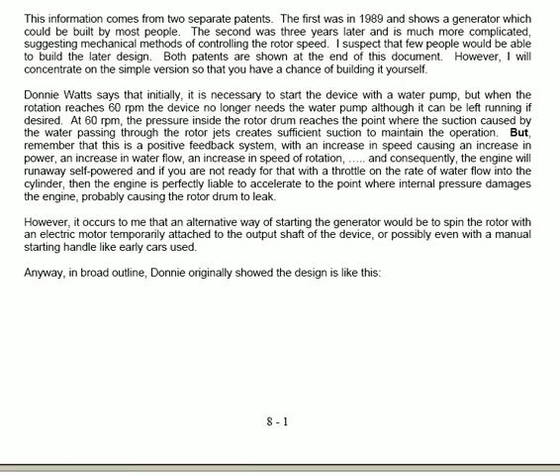However, it occurs to me that an alternative way of starting the generator would be to spin the rotor with an electric motor temporarily attached to the output shaft of the device, or possibly even with a manual starting handle like early cars used. Anyway, in broad outline, Donnie originally showed the design like this.

You have a hollow cylinder which is 48 inches in diameter, 6 inches thick, and has 16 jets angled at 25 to 30 degrees to the cylinder tangent. There's a special coupling, one side of which is stationary, the other side of which rotates, feeding a fluid into the drum via the pressure applied by a pump, and with a valve in the line so that you can shut it down or choke it off to a lower speed if that becomes necessary.

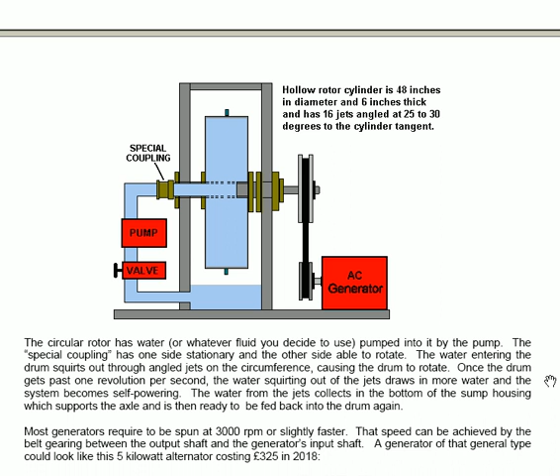The output shaft through pulleys drives an AC generator or alternator. The circular rotor has water or whatever fluid you want to use pumped into it by the pump. Most generators require to be spun at 3000 revs per minute or slightly faster. That speed can be achieved by the belt gearing between the output shaft and the generator's input shaft. That linkage there.

A generator of that general type could look like this particular one here, which is a 5 kilowatt alternator, which in 2018 cost £325 in the UK.

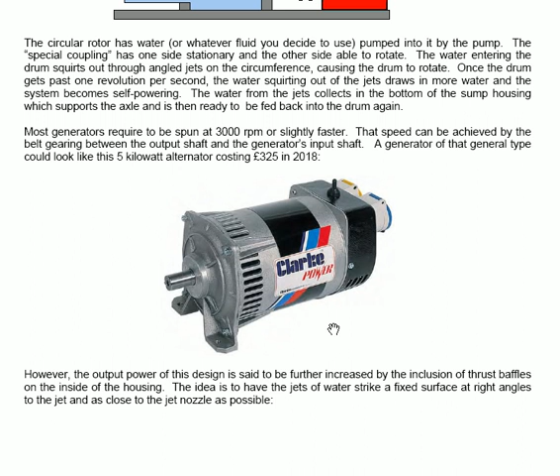However, the output power of this design is said to be further increased by the inclusion of thrust baffles on the inside of the housing. The idea is to have jets of water strike a fixed surface at right angles to the jet and as close to the jet nozzle as possible.

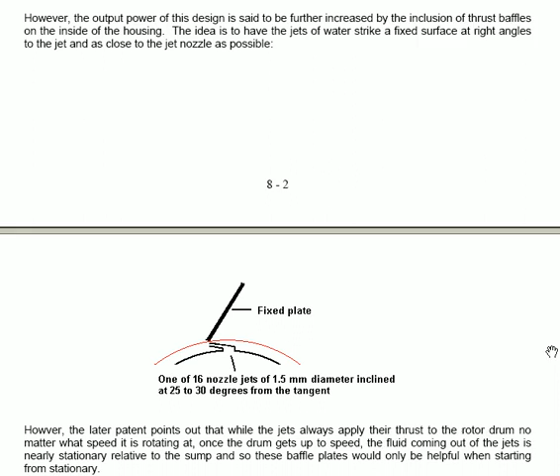However, the later patent points out that while the jets always apply their thrust to the rotor drum, no matter what speed the drum is rotating, once the drum gets up to speed, the fluid coming out of the jets is nearly stationary relative to the sump, and so these baffle plates would only be helpful when starting from stationary.

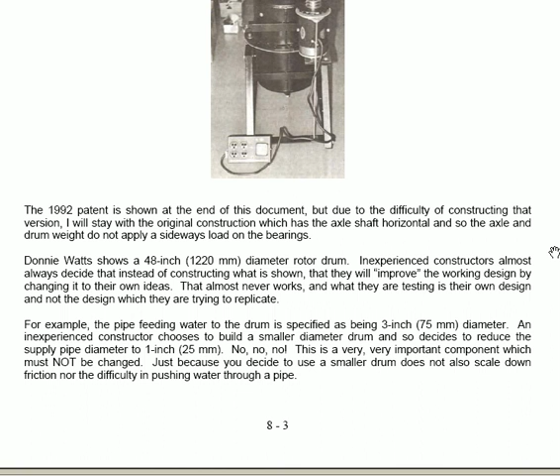The 1992 patent is shown at the end of the document, but due to the difficulty of constructing that version, I will stay with the original construction, which has the axle shaft horizontal, and so the axle and drum weight do not apply a sideways load on the bearings. Donnie shows a 48-inch drum, which is 1220 millimeters diameter rotor drum.

Inexperienced constructors almost always decide that instead of constructing what is shown, they will improve the working design by changing it to their own ideas. That almost never works, and what they are testing is their own design and not the design which they're trying to replicate. And then they end up going online and saying, "Oh, this design doesn't work. I built it and it doesn't work," ignoring the fact that they never ever built it the way it was designed. But anyway.

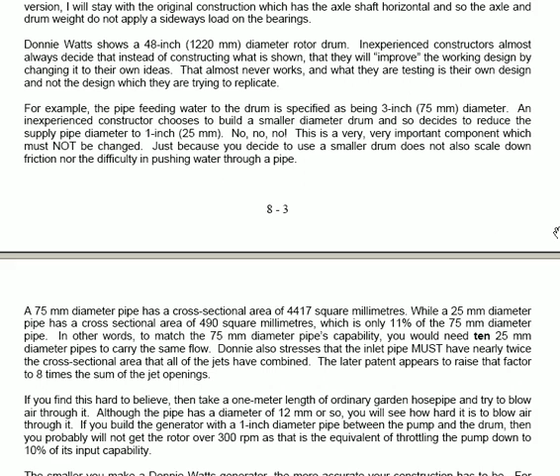For example, the pipe feeding water to the drum is specified as being 3-inch or 75 millimeters in diameter. An inexperienced constructor chooses to build a smaller diameter drum and so decides to reduce the supply pipe diameter to 1 inch or 25 millimeters. No, no, no. Definitely not. This is a very, very important component which must not be changed. Just because you decide to use a smaller drum does not also scale down friction nor the difficulty in pushing water through a pipe.

A 75 millimeter diameter pipe has a cross-sectional area of 4,417 square millimeters, while a 25 millimeter diameter pipe has a cross-sectional area of 490 square millimeters, and that's only 11% of the 75 millimeter diameter pipe. In other words, to match the 75 millimeter diameter pipe's capability, you would need 10 25 millimeter diameter pipes to carry the same flow, because the smaller pipes have greater friction.

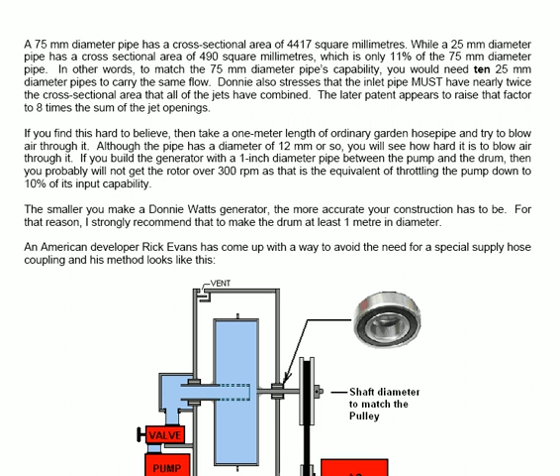Donnie also stresses that the inlet pipe must have nearly twice the cross-sectional area as compared to that of all the jets combined. The later patent appears to raise that factor to 8 times the sum of the jet openings. If you find this hard to believe, then take a 1 meter length of ordinary garden hose pipe and try to blow air through it. Although the pipe has a diameter of 12 millimeters or so, you will see how hard it is to blow air through it.

If you build a generator with a 1-inch diameter pipe between the pump and the drum, then you probably will not get the rotor over 300 revs per minute, as that lower sized pipe is the equivalent of throttling the pump down to 10% of its input capability. The smaller you make a Donnie Watts generator, the more accurate your construction has to be. For that reason, I strongly recommend that to make the drum you should use at least 1 meter in diameter.

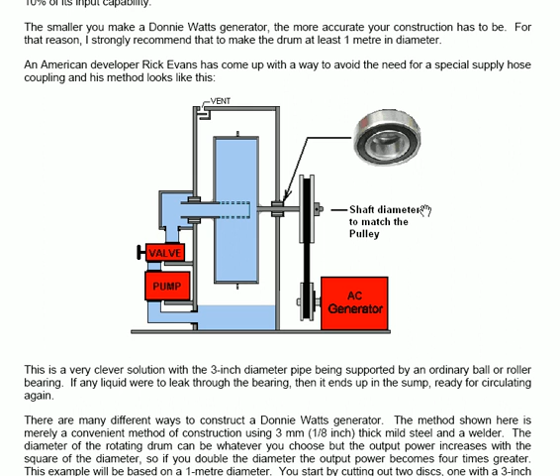An American developer, Rick Evans, has come up with a way to avoid the need for a special supply hose coupling, and his method looks like this. The water in the sump is drawn up through the pump, through the valve, and into a container which encloses both the rotating pipe axle of the drum and the bearing which supports the drum. This is a very useful addition because it's difficult to get rotating pipe coupling of that sort of size and ability. It's a very clever solution.

There are many different ways to construct a Donnie Watts generator. The method shown here is merely a convenient method of construction using 3mm, which is 1/8 inch, thick mild steel, and a welder. The diameter of the rotating drum can be whatever you choose, but the output power increases with the square of the diameter. So if you double the diameter, the output power becomes 4 times greater. This example is going to be based on a 1 meter diameter disc.

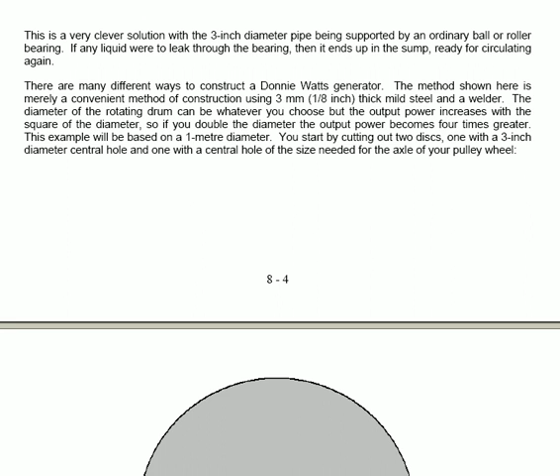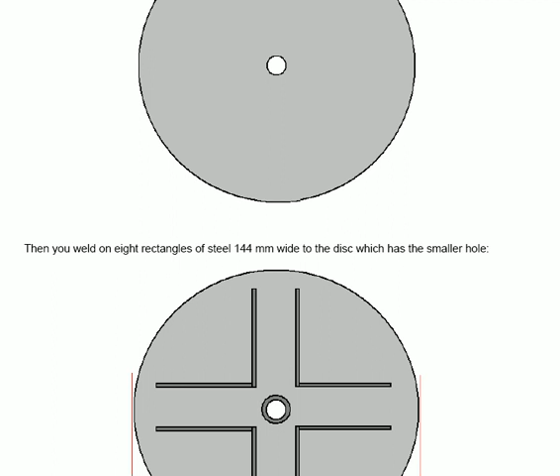You start by cutting out 2 discs, one with a 3-inch diameter central hole and one with a central hole of the size needed for the axle of your pulley wheel, which attaches to the alternator. Then, having cut out the 2 circles of steel, you weld on 8 rectangular pieces of steel which are 144mm wide. You weld them to the disc which has the smaller hole. So there's your disc, and there are the 1, 2, 3, 4, 5, 6, 7, 8 pieces of rectangular steel which are welded to your circular drum.

Those form channels for the water or other fluids such as transmission fluid as it passes through the drum when the generator is operating. There must be at least 50mm or 2 inches clear between these plates and the edge of the disc.

That's this space here between the end of the plates and the end of the discs. That's to allow water to flow easily past the plates around the rim of the drum itself. The 144mm depth of the plates allows clearance for the second disc to be welded in place to form a drum. Seen from the side, it looks like this. Then the outer rim of the drum will be welded in place.

If you have never built anything in steel, let me assure you that it's not at all a difficult thing to do. And yes, I have built in steel, starting as a total beginner. However, while mild steel is easy to work and weld, stainless steel is much more difficult, so avoid stainless steel.

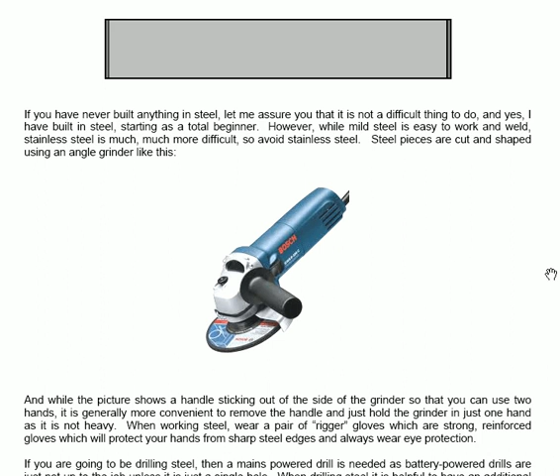Steel pieces are cut and shaped using an angle grinder, like this. And while the picture shows a handle sticking out of the side of the grinder so that you can use 2 hands, it's generally more convenient to remove the handle and just hold the grinder in 1 hand, as it's not heavy. When working steel, wear a pair of rigger gloves, which are strong reinforced gloves and will protect your hands from sharp steel edges, and always wear eye protection.

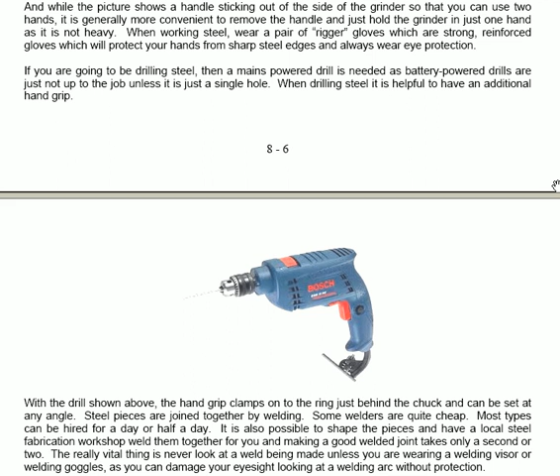If you're going to be drilling steel, then a mains powered drill is needed, as battery powered drills are just not up to the job, unless it's for just one single hole. When drilling steel, it is helpful to have an additional hand grip attached to it. With this particular drill here, the circular projection here on the drill itself allows you to clamp a hand grip around that, and the hand grip can be set at any angle.

Steel pieces are joined together by welding. Some welders are quite cheap. Most types can be hired for a day or half a day. It's also possible to shape the pieces and have a local steel fabrication workshop weld them together for you. And making a good welded joint only takes a second or two. The really vital thing is never look at a weld being made unless you're wearing a welding visor or welding goggles, as you can damage your eyesight by looking at a welding arc without protection.

If you decide to buy a welder, then be sure to get one which will run on your house mains supply. Otherwise you have to upgrade your house wiring to carry the higher current. This particular welder will be suitable, and at the start of 2016 it cost only £60, including tax, which is about €82 or $90.

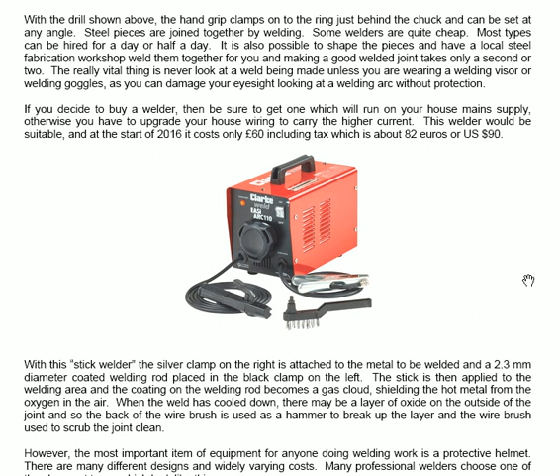With this so-called stick welder, the silver clamp on the right is attached to the metal to be welded, and a 2.3mm diameter coated welding rod placed in the black clamp. The stick is then applied to the welding area, and the coating on the welding rod becomes a gas cloud, shielding the hot metal from the oxygen in the air. When the weld is cooled down, there may be a layer of oxide on the outside of the joint, so the back of the wire brush can be used as a hammer to break up the layer, and the wire brush itself used to scrub the joint clean.

However, the most important item of equipment for anybody doing welding work is a protective helmet. There are many different designs and widely varying costs. Many professional welders choose one of the cheapest types, which looks like this. This type has a clear glass screen and a hinged safety filter. Professionals adjust the hinge tension so that the filter can only just stay in its raised position.

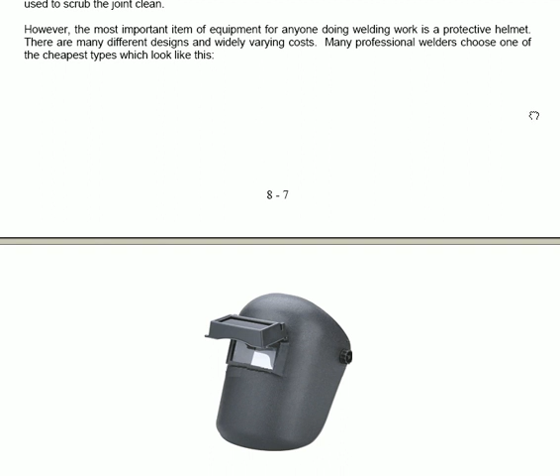The welder then positions the joint pieces in their exactly correct position while looking through the plain glass, and when ready to start the weld, he just nods his head, which makes the filter drop into place, and the weld is started. Once the weld is started, you can see clearly through the filter. Never ever try welding without proper eye protection.

Welding is easy to learn, and it's a brilliant method of construction, but it has one major problem. When a joint is made, the two pieces of steel melt and merge together. This can happen in a tenth of a second. Don't put your finger on the joint to see if it is still hot. If it is, then you get a painful burn, and that should remind you not to do that again.

That heat is a problem because when steel gets hot, it expands, and when it cools down, it contracts. That means if you were to set up a piece of steel at exactly right angles and weld the pieces together, then as soon as the joint cools down, it contracts and pulls the joint out of alignment. So what was vertical is no longer vertical.

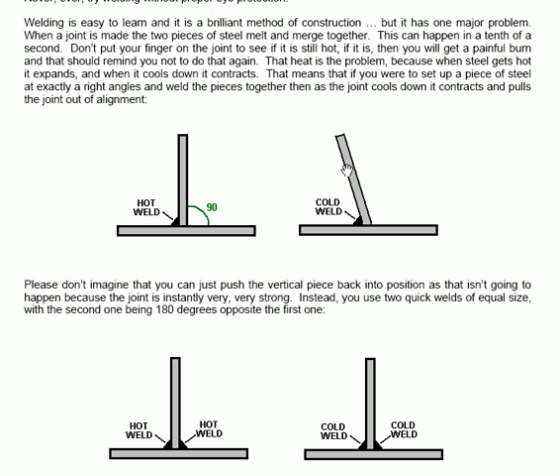Please don't imagine that you can just push the vertical piece back into position, as that isn't going to happen, because the joint is instantly very, very strong. Instead, you use two quick welds of equal size, with the second weld being 180 degrees opposite the first one. So you do one weld on this side and immediately one weld on the other side. Then when the welds cool down, the pulls oppose each other and the vertical piece stays vertical.

Metal can be cut quite readily using a cutting blade in your angle grinder, but be sure to install the blade so that it rotates in the direction shown by the arrow on the blade. The blade is likely to look something like that.

When cutting or grinding, always wear protective goggles to make sure that you don't get a metal fragment in your eye. Eyes are not readily replaceable. If you do get a small steel fragment in your eye, remember that steel is highly magnetic, and so a magnet may help in getting the fragment out with a minimum of damage. However, it's much easier to wear goggles and not have the problem in the first place.

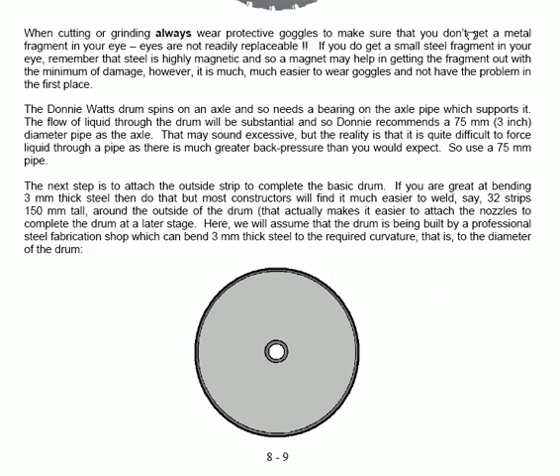The Donnie drum spins on an axle, and so it needs a bearing on the axle pipe which supports it. The flow of liquid through the drum will be substantial, and so Donnie recommends a 75mm or 3-inch diameter pipe as the axle. That may sound excessive, but the reality is that it's quite difficult to force liquid through a pipe, as there's much greater back pressure than you would expect. So use a 75mm diameter pipe.

The next step is to attach the outside strip to complete the basic drum. If you are great at bending 3mm thick steel, then do that, but most constructors will find it much easier to weld, say, 32 strips 150mm tall around the outside of the drum. That makes it easier to attach nozzles to complete the drum at a later stage. Here we will assume that the drum has been built by a professional steel fabrication shop, which can bend 3mm thick steel to the required curvature, that is, to the diameter of the drum.

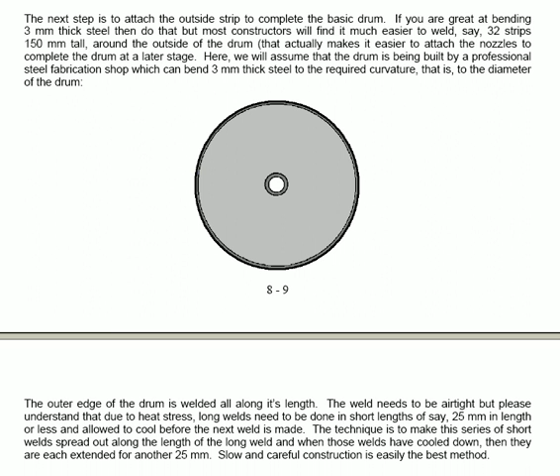The outer edge of the drum is welded all along its length. The weld needs to be airtight, but please understand that due to heat stress, long welds need to be done in short lengths of, say, 25mm in length or less, preferably less, and allowed to cool before the next weld is made. The technique is to make this series of short welds spread out along the length of the long weld, and when those short welds have cooled down, then they're each extended for another 25mm. Slow and careful construction is easily the best method.

We now need to attach nozzles through the outer wall of the drum. A hole needs to be drilled through the outer wall for each nozzle. As with all holes drilled through steel, the hole is drilled at right angles to the steel, that is, perpendicular. I'm not saying that you can't drill a hole at an angle, but it is very, very difficult to do without breaking the drill bit, and it's very difficult to hold the drill steady enough to get the hole started.

We want to have the jet of liquid leave the nozzles at 25 degrees to the face of the steel, so that it doesn't hit the next nozzle down the length of the circumference. We also want the jet orifice to be 1.5 millimeters in diameter, so we need to construct jets from steel pipe with that internal diameter, insert them through the outer wall of the drum, and weld them in place. How many jets? I would suggest 16, but the number is not critical.

It is said that the jets of water are more effective if they strike a nearby surface, so we may choose to attach a series of baffle plates to the outer housing. How many baffle plates? I would suggest 16, but these baffle plates are only effective when starting a stationary rotor, and so they can definitely be omitted if you prefer. The diagram of the sump enclosure drawn by Donnie shows angled top edges, but it's probably easier just to use square plates, as there's less cutting and welding if you do it that way.

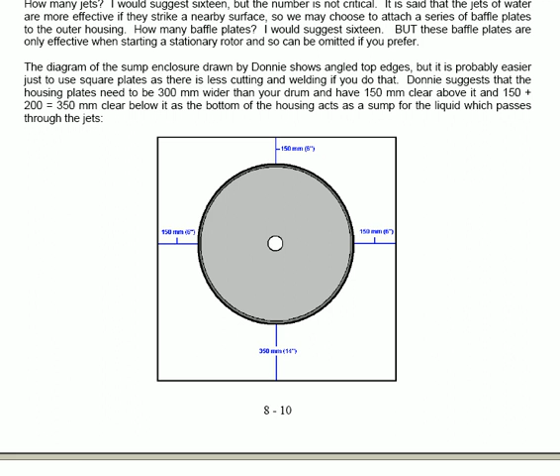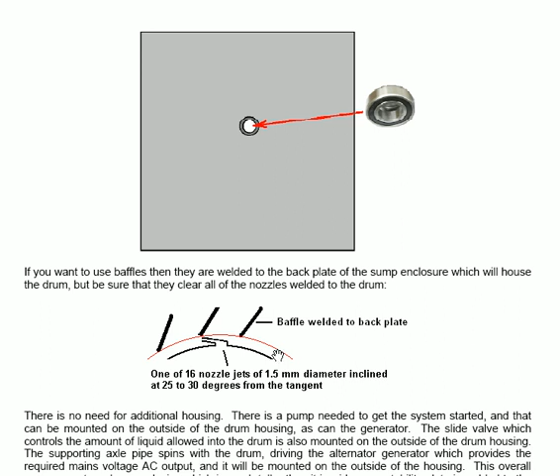There's no need for additional housing. There's a pump needed to get the system started, and that can be mounted on the outside of the drum housing rather, as can the generator. The supporting axle pipe spins with the drum, driving the alternator generator, which provides the required mains voltage AC output, and that'll be mounted on the outside of the housing as well.

This overall arrangement produces a device which is much taller than it's wide. So a stability plate, which is here along the bottom, is welded to give it stability in the left-right direction as shown in this particular diagram.

While the axle shaft can be made of two parts welded together and welded to the drum, I suggest that it's more practical to weld the incoming 3-inch diameter pipe to the drum, and then choosing a solid bar of steel whose diameter matches the size needed for your chosen pulley wheel. That bar is welded to the other side of the drum as shown above, so your pipe is welded on one side and your solid bar shaft is welded on the other side. Both of course have to be exactly aligned and exactly square to the drum, being perpendicular. That gives you the drive to the alternator.

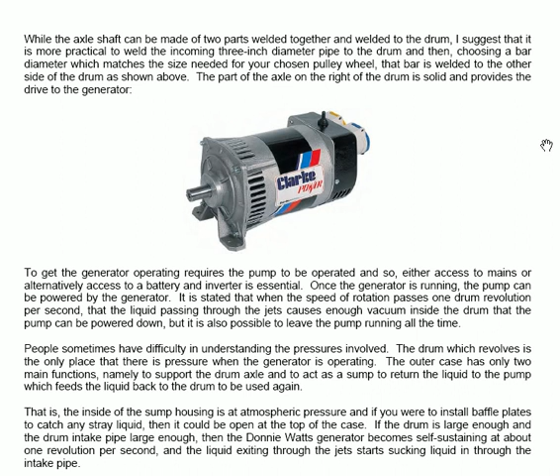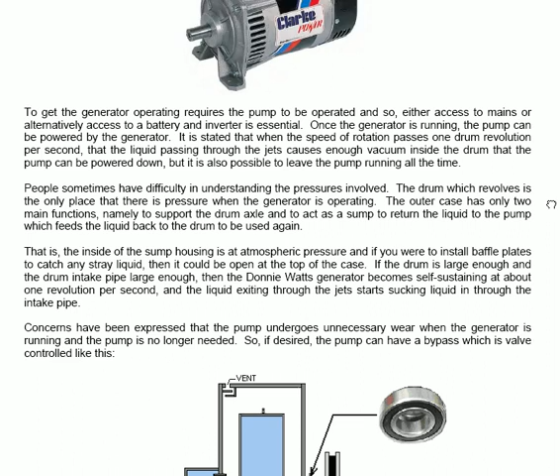The generator is said to be started off and operated by a pump, and so either access to mains supply voltage or alternatively access to a battery and inverter is essential. Once the generator is running, the pump can be powered by the generator. It is stated that when the speed of rotation passes 1 drum revolution per second, the liquid passing through the jets causes enough vacuum inside the drum that the pump can be powered down. But it is also possible to leave the pump running all the time if you want.

People sometimes have difficulty in understanding the pressures involved. The drum, which revolves, is the only place that there is pressure when the generator is operating. The outer case has only two main functions, namely to support the drum so that it can rotate, and the other function is to act as a sump, collecting the liquid that has passed through the drum and making it ready to go back through the pump and valve back into the drum to continue the operation.

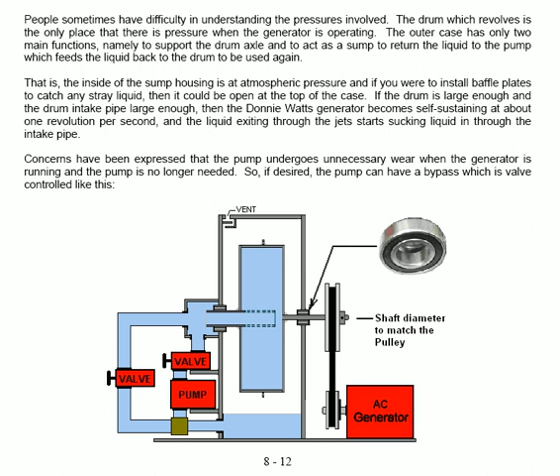Concerns have been expressed that the pump undergoes unnecessary wear when the generator is running and the pump is no longer needed. So if you like, the pump can have a bypass which is valve controlled like this. So the water in the sump goes out through a T connector, through a 3-inch wide pipe, into the area that feeds the rotating pipe, which is part of the drum axle. The pump then can be switched off and the valve here closed permanently if you wish. That allows you to actually take the pump away if you want, but anyway, it's not something that you need concern yourself with. You can stop the pump operating all the time if you want by doing that. That does require some additional piping and a T-junction for the pipe bypass, but it allows the pump to be switched off when not needed.

Let me stress again that this is an exponential positive feedback design which will keep accelerating until the bearings fail or the pressure inside the drum causes some form of rupture which will starve the jets of liquid, or the generator might fail due to excessive speed. While this may seem like irrelevant theory, I assure you that it isn't. You have this generator running and powering your house. The weather is hot. You have an air conditioning unit keeping your house cool. The air conditioner draws a lot of current, but then the thermostat switches the air conditioning off because your house is cool enough. This is a problem. The current draw from the generator goes down by a major amount.

This makes the generator shaft much easier to spin, but the drive power from the Donnie Watts unit is now much higher than is needed. This is not helpful, and the system is now unbalanced, and the drum will speed up, spinning the generator shaft faster than it should. If you're standing there and adjust the control valve accordingly, then everything goes back to normal. But the point is that a generator of this type is fine for a fixed load, but you need to pay attention to what the electrical load is if it changes suddenly. You could build an automatic valve adjustment to make an automatic speed control, or install one or more pressure relief valves. The later patent is mainly about automatic speed control of the drum.

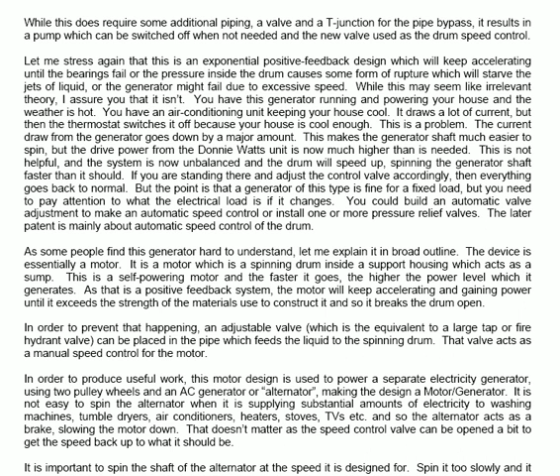This is a self-powering motor, and the faster it goes, the higher the power level it generates. As that is a positive feedback system, the motor will keep accelerating and gaining power until it exceeds the strength of the materials used to construct it, and so it breaks the drum open.

In order to prevent that happening, an adjustable valve, which is the equivalent of a large tap or fire hydrant valve, can be placed in the pipe which feeds the liquid into the spinning drum. That valve acts as a manual speed control for the motor.

In order to produce useful work, this motor design is used to power a separate electricity generator using two pulley wheels and an alternator, making the design a motor generator design.

It's not easy to spin the alternator when it is supplying substantial amounts of electricity to washing machines, tumble dryers, air conditioners, heaters, stoves, TVs or whatever. And so the alternator acts as a brake, slowing the motor down.

That doesn't matter, as the speed control valve can be opened a bit to get the speed back up to what it should be. It is important to spin the shaft of the alternator at the speed it's designed for.

Spin it too slowly and it will produce a voltage which is less than mains voltage, and a frequency which is less than that of the mains. Spin it too fast and the generator will produce a voltage which is higher than mains voltage, and a frequency which is greater than the mains frequency.

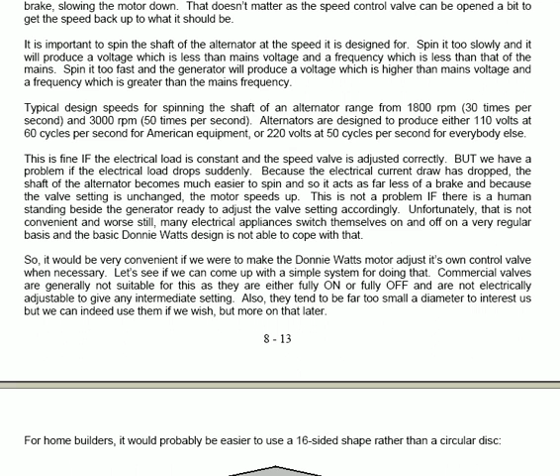Now, to make the first drum side, we start with a square piece of 3mm thick mild steel, which is 1 meter by 1 meter in size, or if you prefer 1000 millimeters by 1000 millimeters.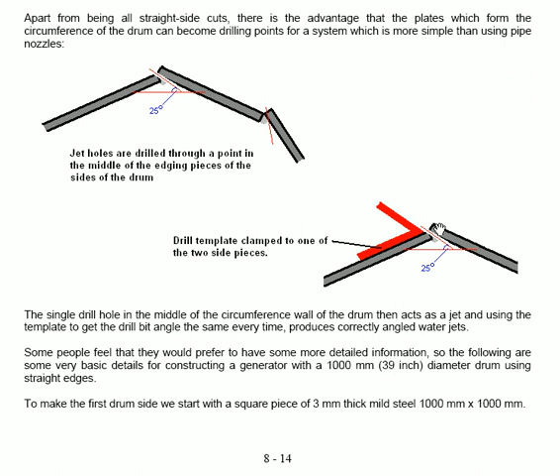You draw diagonals from the corners to establish where the center of the square is, and you then draw vertical and horizontal lines to that point. You measure 500 millimeters from the center point out along each diagonal and mark each of these points. Then you connect all of those points together to make an even octagon.

Next, you mark the central points of each of the 8 sloping lines and draw a line from the center point through each of these new points. That gives you 16 lines coming out from the center at equally spaced angles. Mark 500 millimeters from the central point out along each of these new lines, and then connect those points to give you your 16-sided drum piece.

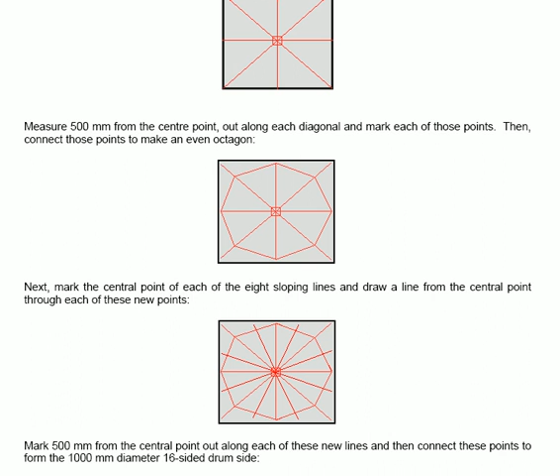When you cut along that, you end up with a 16-sided, completely even side of the drum. When you've got that first side, you clamp it to another piece of 3mm thick mild steel and mark carefully around it to get the shape and size of the second side of the drum. Cut around this new side and draw some diagonals on it to establish the center point.

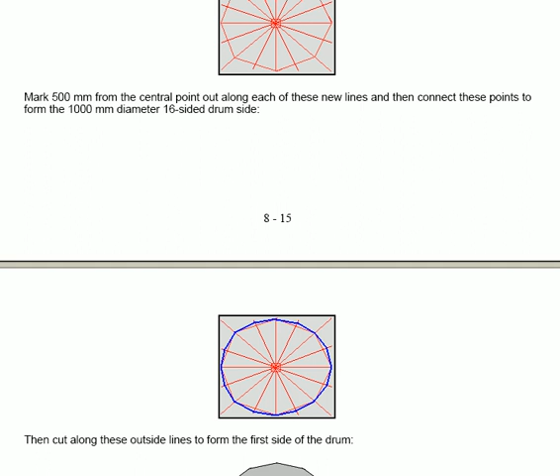One of these two drum plates needs to have a 3-inch, that's 75mm, intake pipe installed as an axle. You could get a local steel fabrication shop to drill the hole for you. Alternatively, you could mark the exact position and size and drill a ring of small holes around the circumference, then with a small cutting blade in the angle grinder cut between the holes, and using a grinding disc in a power drill smooth out the unevenness between the holes to give a reasonable quality hole accurately positioned.

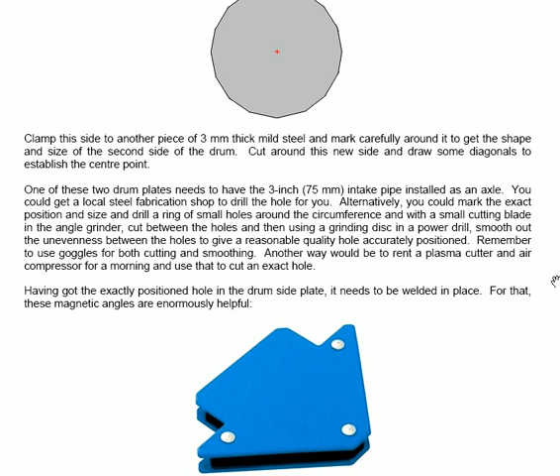Remember to use goggles for both cutting and smoothing. Another way would be to rent a plasma cutter and air compressor for a morning and use that to cut an exact hole. Having got the exactly positioned hole in the drum side plate, the pipe needs to be welded in place.

For doing that, these magnetic angles are enormously helpful. They're 4 inches along each side, or 100 millimeters along each side, and they are low cost, and they grip steel and the steel pipe very strongly, and they make a perfect 90-degree angle. Using 4 of those magnetic clamps, you can hold the pipe securely and accurately.

Remember that the moment a weld is made to one side of the drum plate, the other side of the drum plate needs to be welded immediately, and both allowed to cool as slowly as possible to avoid heat shrinkage pulling the pipe out of its alignment with the drum plate. Remember that the drum plate will be hot enough to burn you, even if the weld only took a split second to make, so take care.

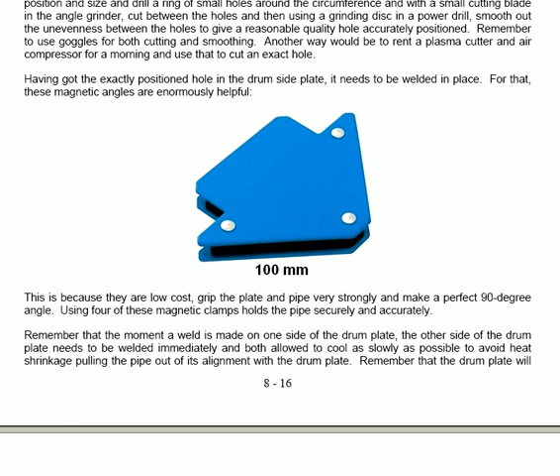In other words, if the pipe is vertical, then almost simultaneous welds need to be made on top of the drum plate and on the underside of the drum plate. The thicker the steel, the easier it is to weld without problems, so welding the pipe is straightforward. It takes a great deal of skill to weld steel sheet of 1mm thickness without tearing a hole in the sheet, but thankfully that's not something you need to bother with, because you don't have to do it.

Having tack welded the pipe carefully and quickly on both sides, using welds of only 6mm or so long, and having waited for those welds to cool down fully, make 2 additional tack welds at 180 degrees around from the first 2, and then 2 more pairs, so that you have a weld every 90 degrees around the pipe. Then welding all around the pipe is completed only in very short lengths in opposing pairs, letting the welds cool before making the next weld.

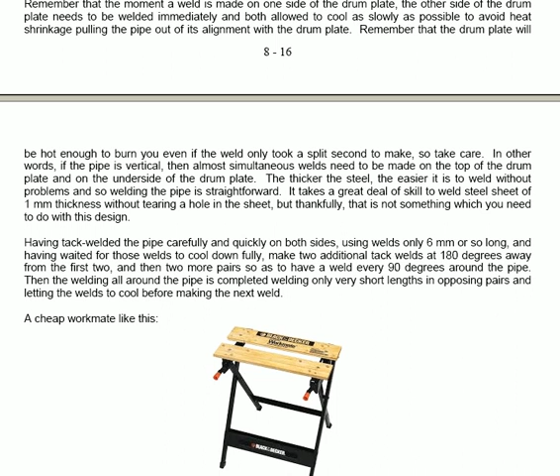A cheap workmate bench like this makes a good support for this work, and it allows the pipe to be gripped securely while the drum plate is resting horizontally on the bench. If you feel that an open 3-inch diameter pipe is not sufficient to get the liquid into the drum, then make as many openings or drill holes or angle grinder slits as you can consider necessary in the drum pipe on the inside of the drum. So in other words, the pipe inside the drum can have lots of holes or cuts in it.

Mild steel 3mm thick can be supplied in 150mm wide strips. They're 8 feet long. One of those would reduce the amount of steel cutting needed to complete the drum, as it's needed for the internal channels and for the circumference wall of the drum.

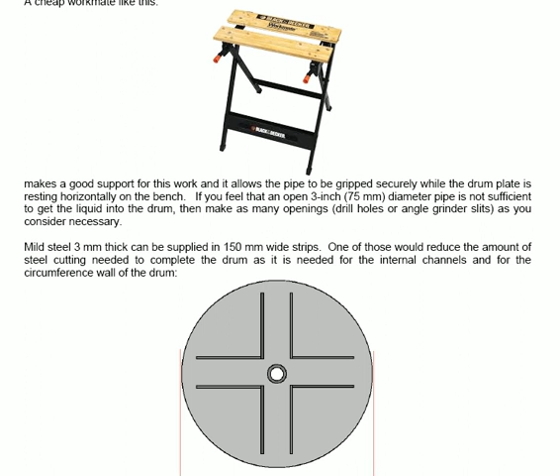The inside walls need 6mm taken off them if you're going to do that. As the drum diameter is 1000mm and 150mm is left around the center and 50mm is left at each side, the 8 internal walls need to be only 500 minus 75 minus 50, equaling 375mm, which is 14.76 inches long. The 150mm clearance in the center of the disc does not need to be exact, so cutting 370mm from your 150mm strip will do nicely for all 8 walls.

As we want to use the width of the 150mm strip to make the 16 circumferential strips, measure the exact width of the strip supplied to confirm that it's 150mm wide. I have never been supplied a strip which was not accurately 150mm wide, but check carefully to make sure that your strip is exactly 150mm wide, and adjust the measurement slightly if it isn't.

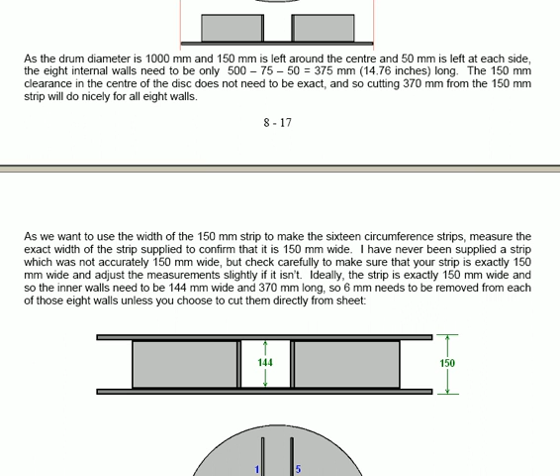That's the measurement of the internal walls I'm talking about. Ideally, the strip is exactly 150mm wide, and so the inner walls will be 144mm wide and 370mm long. So 6mm needs to be removed from each of those 8 internal walls, unless you choose to cut them directly from sheet.

Using the magnetic clamps to hold each plate vertical when positioning and tack welding it, you tack weld all of the plates 1, 2, 3, 4, 5, 6, 7, 8 on the inside of one of the plates. Complete the welding of these 8 plates, remembering to take it slowly, always use simultaneously opposing welds, and allow each weld to cool naturally.

The next step is to attach the second side of the drum. The really important thing here is to align the second side exactly, and the magnetic angles are useful for doing that. Measure the straight edges which form the circumference of your drum and cut 2 150mm strips to that exact length.

It's probably better to do the marking of the steel strip directly against the rotor drum rather than relying on measurement. You can make a mistake in measurement. You can't make a mistake when you put the piece up against the drum and mark it off.

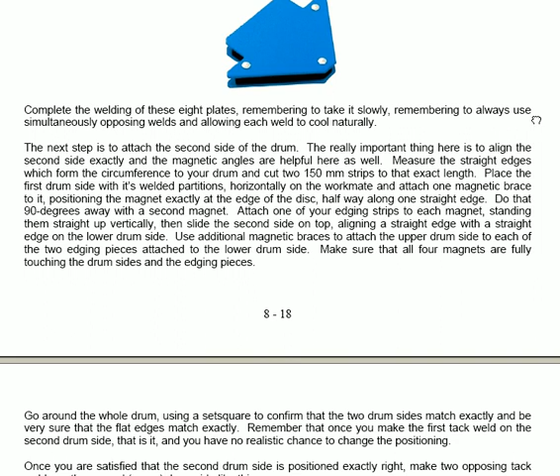You go around the whole drum once you have the second side aligned to where you think it should be, and confirm that the 2 drums match exactly. Be very sure that all flat edges match exactly.

When you make your first tack weld on the second drum side, that is it, and you've no realistic chance to change the positioning. Once you're satisfied that the second drum is positioned exactly right, make 2 opposing tack welds

on the upper second side of the drum, like this. One there, one here. These welds are made upwards, so be sure that you're wearing good strong gloves, as getting molten metal on bare skin is not a pleasant experience.

Then you make 2 more opposing tack welds, like this one here and this one here. You can then turn the drum over so that the following welding is downwards, and you're not liable to get hot metal coming at your hands.

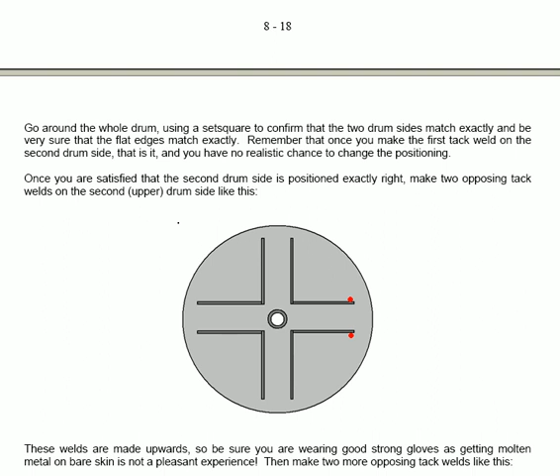There's room to weld inside the drum, as the pieces forming the channel walls are only 370 millimeters long, and there's 144 millimeters of clearance between the drum sides. These 8 short pieces hold the drum sides securely and give the drum major strength. Strictly speaking, the above diagram should show 16-sided discs rather than circles.

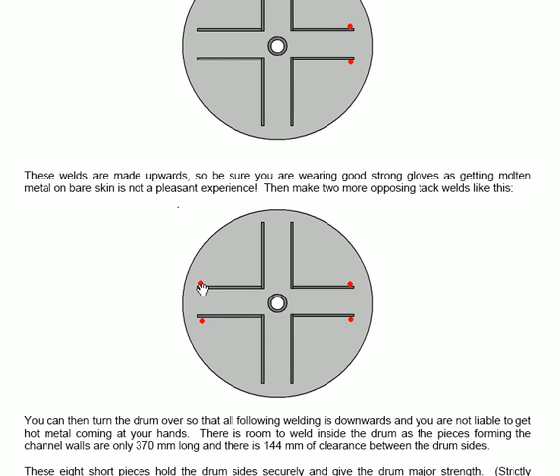We come now to attaching strips to the side of the drum to form the outer drum wall. Remove the magnets and alignment side strips and turn the drum sideways and clamp it in the workmate so that the drum edge is facing upwards, and so it's easy to work with.

The vertical outer wall of the drum is made up of 16 strips of steel, each 150 millimeters wide. Each strip will be about 196 millimeters long, but that length is marked on the strip directly against the straight side of the drum disc. You start by welding these narrower strips as the vertical walls.

Take 2 edging pieces already cut and weld them to the drum in opposite positions around the drum. You do one at one side and then the other one at the other side. The welds can be made inside the drum if you want.

2 more circumference pieces are then measured carefully, cut and welded like this, one opposing the other. So you then have 4 at 90-degree intervals around your disc. Then you do 4 more, spacing them out, and this is where it becomes interesting.

The final plates need to be measured very accurately, and they will be welded in place like this, so that there's a V-notch between each plate. The V-notch between the plates is very important, as it's where the nozzle jets will be drilled.

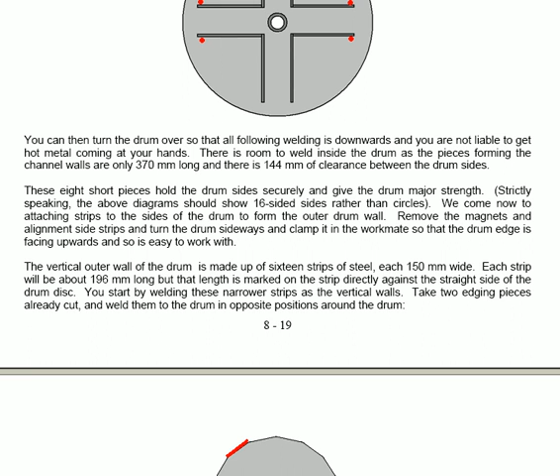You have the sides of the drum and 2 plates being welded to it with a V-notch between them. So you drill a hole through the plates in the middle of the 2 plates in the joint between them. You drill it at the correct angle that's chosen, and that's the way that you create the jets without any extra welding.

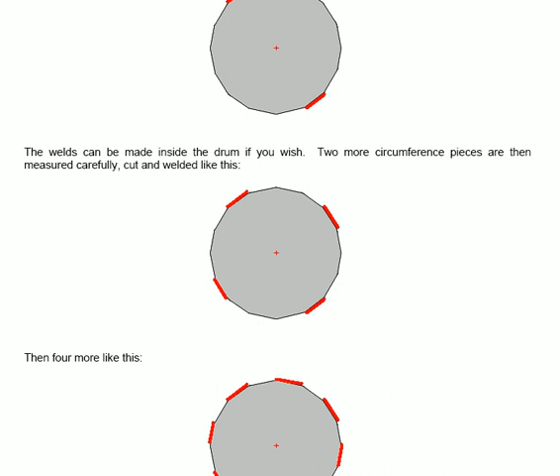It may be necessary to lower the next circumference plate just opposite the jet exit using a grinding tool so that it doesn't interfere with the jet of liquid leaving the drum, and that would be this point here, but it generally speaking is not likely to be necessary.

So after all that effort, you now have a strong and secure drum, but it only has a 3-inch diameter inlet pipe attached, and we need the axle support bar on the other side of the drum. What diameter should that bar be? I don't know, because it needs to have a pulley mounted on it.

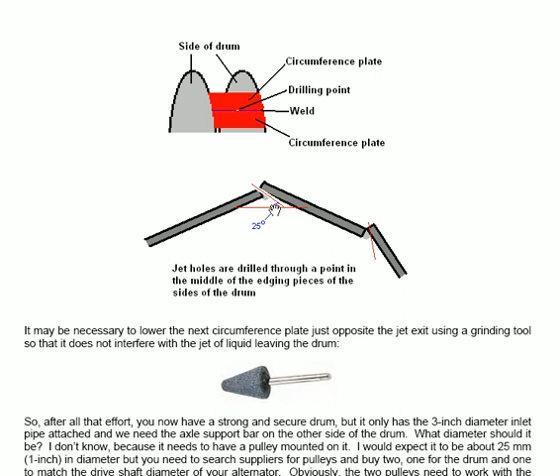I would expect it to be about 25 millimeters or 1 inch in diameter, but you need to search suppliers for pulleys and buy 2, one for the drum and one to match the drive shaft diameter of your alternator. Obviously, the 2 pulleys need to work with the same drive belt. Ideally, the drum pulley should be 2 or 3 times the diameter of the alternator pulley.

In fact, any ratio up to say 5 times would be good, as the working output of the alternator will be reached at lower drum revolutions, and that would give smoother running if the drum construction is not perfect. So we have identified what shaft diameter is needed for the drum output, and we've purchased a mild steel bar of that diameter. The center point of the second drum side is marked.

If you have cleverly welded it on the inside of the drum, then draw diagonals to get the center point on the outside. Check it by clamping the 3-inch pipe in the workmate, placing the drum inlet pipe in it, and spinning the drum. The center point should appear stationary when the drum spins. Holding a felt tip pen stationary, mark a small circle by touching the drum close to the center, say a circle of about 30 millimeters in diameter. This is where the pulley bar needs to be welded.

Using the 4 magnetic clamps to position the bar in the middle of the circle, with the clamps at 90-degree angles to each other, spin the drum again to make sure that the bar does not appear to move. If it does appear to move, then correct the position until the bar seems motionless. Then tack weld between the magnets. Unfortunately, heat destroys magnets, and so welding so close to the magnets might destroy them. Thankfully, they're very cheap to replace.

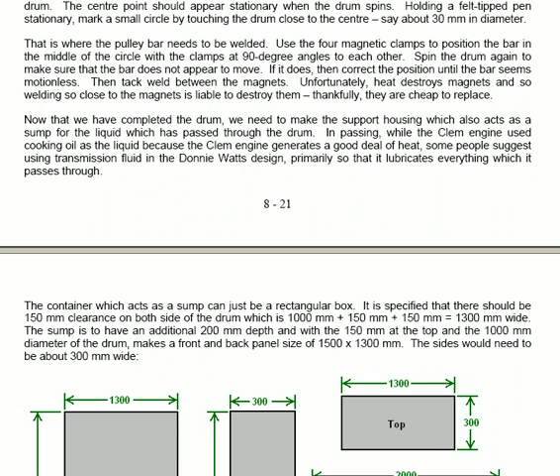It is specified that there should be 150 millimeter clearance on both sides of the drum. So the sizes for the pieces are shown here. The front and back are 1.5 meters tall and 1300 millimeters wide. The sides are 300 millimeters wide and 1.5 meters tall. The top is 1300 millimeters wide, 300 millimeters deep. The base is 2000 millimeters or 2 meters long and 600 millimeters wide. This gives you a good deal of stability in the box.

The front has a 3-inch diameter hole drilled in it. The back has a hole drilled in it, if you wish, which is the size of the bar that you use for your alternator drive. Strictly speaking, that isn't actually correct. The hole size for the 3-inch pipe is the 3-inch pipe plus the size of the bearing that holds it. The same goes for the hole on the back. The hole size is the size needed to allow the bearing of the solid shaft to pass through the hole. The bearings can be tack welded to the actual plate itself.

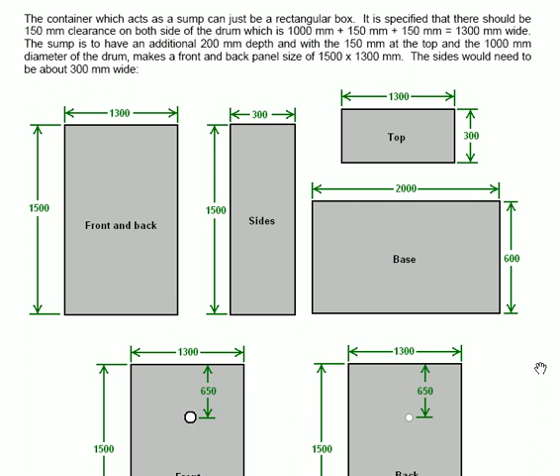The next step is to construct baffle plates to catch the jets of liquid coming out of the nozzles of the drum, if you decide to use them. Personally, I think they're probably a waste of time, but you can put them in if you wish. The hole is created in the front panel and the bearing is attached. The bearing will be the best 75 millimeter diameter bearing which will fit your intake pipe and mount securely to the front panel. You can have it bolted or you can tack weld it.

With the bearing fitted in place, the front panel on the workmate is used to support the drum face, and it can be clamped in place. This gives you a flat horizontal surface with the drum in its exact position. Clamp the drum in place so it can't move, and if you want baffle plates, then use one of the magnetic clamps to position each piece and mark the position of the first baffle. With the drum fixed in place, mark the position of the matching 15 other baffle plates. Unclamp and remove the drum so that there's a clear unencumbered work area.

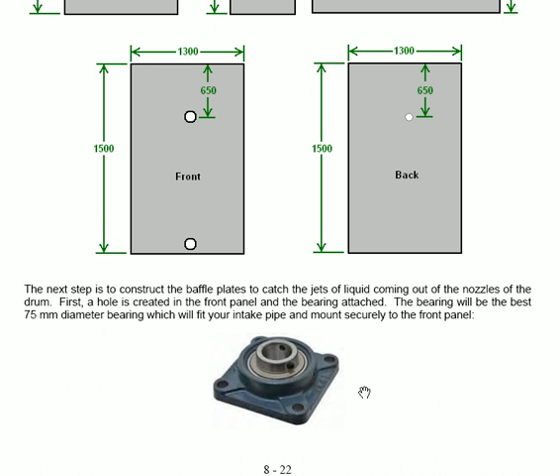Using a magnetic clamp, position one baffle plate and tack weld it in position, the tack weld on the drum side and an immediate matching tack weld on the side away from the drum. Remember that we need matching welds to stop the cooling weld pulling the baffle plate away from the vertical.

Next, you put the drum back and give it a spin to make sure that the drum clears all of the baffle plates. I seriously doubt the spacing specified for the housing. The liquid squirts through the drum nozzles and hits the baffle plates, but then where does it go? It has lost its momentum and it will just fall under gravity. Some will fall on the drum, which will hurl it off to the wall where it will fall down into the sump. Part will fall clear of the drum and will fall down the side of the housing.

So why the gap? 75mm should easily be enough to allow that to happen, no matter what the drum diameter is. 5mm of space outside the baffles should actually be quite enough. The physical size and shape of the pump is not important. It's located outside the sump housing.

I've been asked what is the minimum pump size, but I don't know. The most I can say is that Donnie Watts specified a 500-watt pump for his 4-foot diameter drum, but I feel that a more powerful pump would be helpful. Please understand, I have never built or even seen a Donnie Watts generator. I believe that it will work exactly as specified, especially since the very similar Clem motor worked well, but I can't guarantee that it will.

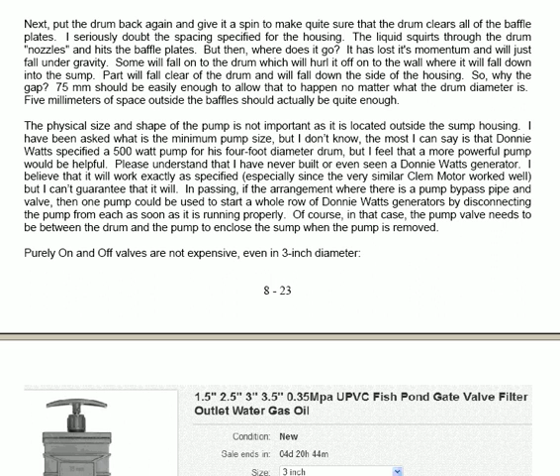In passing, if there is a pump bypass pipe and valve, then one pump could be used to start a whole row of Donnie Watts generators by disconnecting the pump from each one as soon as it's running properly. But anyway, there need to be valves to stop the liquid spilling out if the pump is removed, but we can ignore that. Purely on and off valves are not expensive, even in 3-inch diameter.

This is a typical one which is on offer on eBay, 3-inch size, and they're looking for $30 for it, and that can be used as your emergency controlled stop valve on the inlet pipe to the drum. It appears that the valve is either fully on or fully off. There are valves which claim to be fully adjustable under electronic control, but nothing suitable has been found.

So for the moment assume that the generator will be run under constant load and just construct the box surrounding the drum intake pipe as 300 by 300 by 150mm in size, with a removable 300 by 300mm side sealed with a plastic or rubber gasket.

If you feel that a generator which is restricted to a fixed load is really not at all that useful, then think again. Consider using it to power an Elmer Grimes water supply system. The US patent 2996897 of the 22nd of August 1961 is more than 50 years old, and it describes a system which can produce drinking quality pure water. It is effectively an outdoor refrigerator.

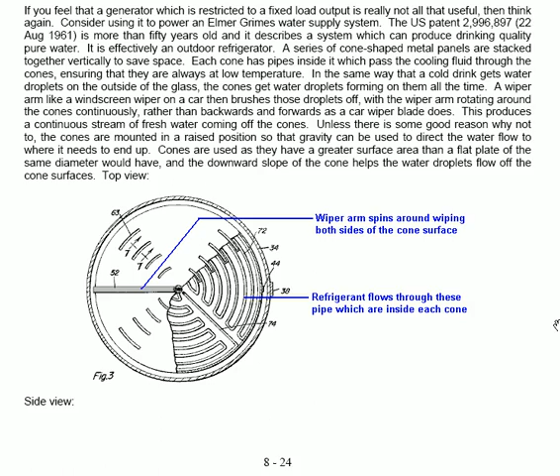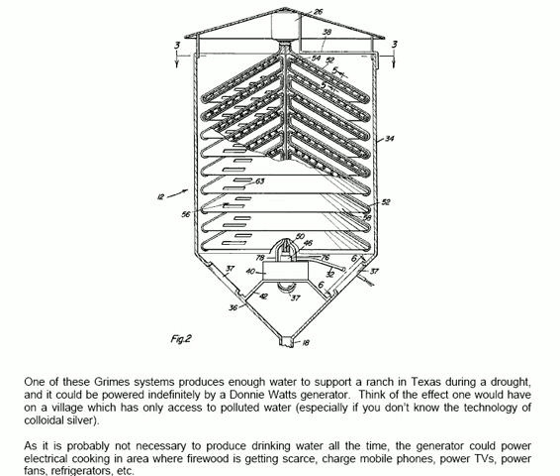The inside of the sump housing is not pressurized, and it is a very wet area. We don't want any oil leaking out through the drive shaft bearing, so we provide a steel umbrella to cover it. The side of the sump wall can have a protective steel cover, making sure that it stays as dry as possible. To make one of those, you cut 2 triangles in steel and attach them to the side wall to protect the bearing.

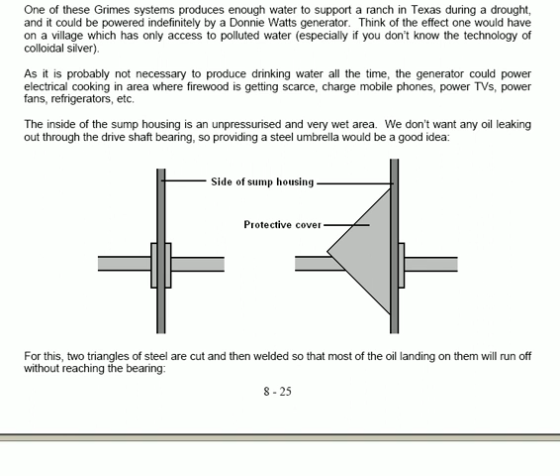Some people may prefer to use commercially constructed components, so let's see if we can come up with a low-cost automatic flow control system. For the system to be automatic, I suggest that we could use electrically operated valves, which can then be governed by a simple control unit. The vast majority of such low-cost valves are only half an inch in diameter and are made for central heating systems, and they're closed unless they're fed with power to open them. I would suggest the following valve. This plastic 1-inch diameter valve costs about £8.

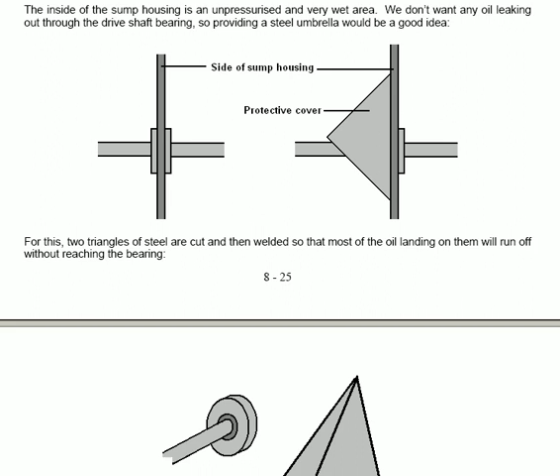We can get variable control from these fixed valves by using a whole row of them to restrict flow. For this we use a second liquid filled box like this. We have a row of say 10 valves, 1-inch diameter valves, connecting the 2 boxes together, but we can control which of those valves is open and which is closed.

The row of 10 valves allows 10 different flow settings when the valves are switched on or off by the control circuit, and there's the added advantage that if the control circuit is powered via the alternator, then there's a major problem if the belt snaps or if there's any other major fault which removes the alternator drag from the output shaft. But if that happens, all valves will automatically shut down and block the flow due to the lack of voltage to keep them open.

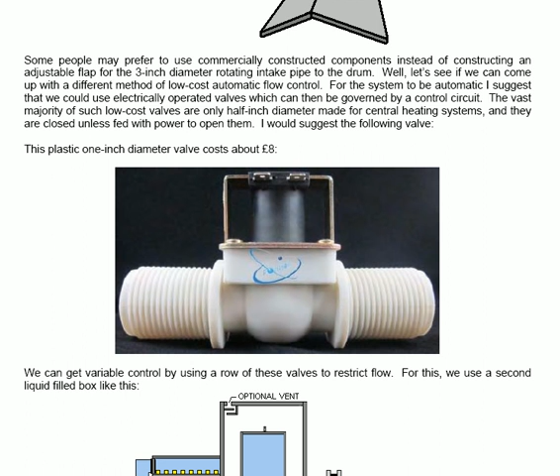The arrangement could be like this. The AC generator powers a power supply unit which powers the circuit. The circuit can sense magnets in a disc on the output shaft spinning past a sensor, a Hall effect sensor. The output from the circuit controls each of the 10 valves by either passing current through the coil around them or not passing current through the coil. And if they're all open, it's the same as there being completely free flow into the drum, and if they're all closed, you get no flow into the drum. With some closed and some open, you get intermediate positions.

You can use a disk to assess the rotation speed, but it's easier probably, not as significantly elegant as having a sensor. You can use the generated voltage by the AC generator to let your circuit sense if the generator has been spun at the right speed. You can do that quite readily if you wish.

With that sort of arrangement, if the drive belt were to break or the alternator were to develop a serious fault, then the circuit voltage would drop off and the circuit would no longer supply current to the open valves, and all valves would close, shutting off the generator, which is exactly what's needed. Now all that's needed is a simple circuit to control the valves. Please understand clearly that I've never been trained in electronics, I'm only self-taught, so feel completely free to consult an expert to provide you with a better circuit.

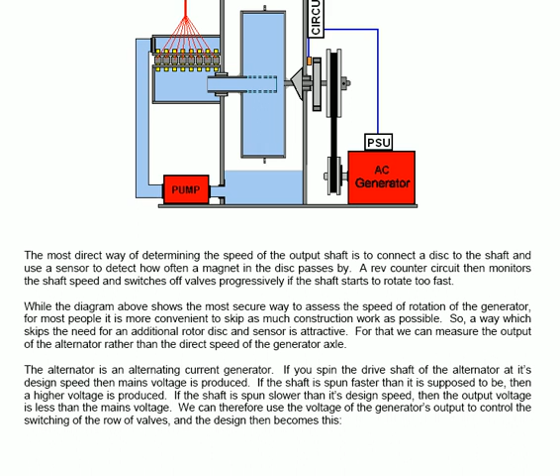The valve opens if fed 300 milliamps of current at 12 volts. That is 3.6 watts of power for each valve, or just 36 watts for all 10 valves. The alternator produces mains voltage, so we'll drop that down to around 12 volts, both for safety's sake and to make the circuit components cheaper. To drop the voltage down, we use a simple power supply comprising a 3 amp mains transformer here, which produces 12 volts on this side.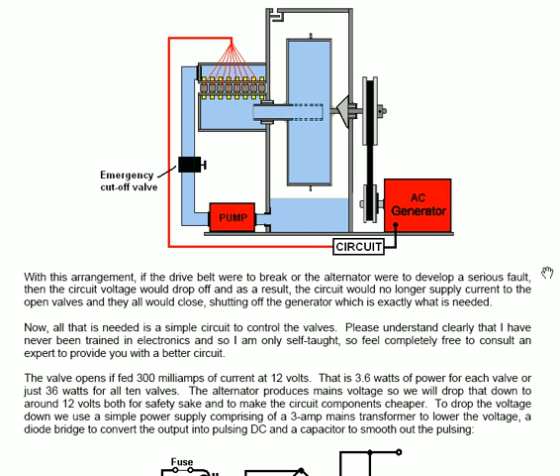The diode bridge here of 4 diodes is used to convert the output into pulsing DC, and a simple capacitor across the output smooths the power supply to a perfectly reasonable level.

As with all circuits, and especially mains circuits, we install a fuse or circuit breaker as the first component connected to the mains, and we insulate all metal components to make sure that we don't accidentally touch them and get a nasty shock. Once the voltage is down to 12 volts, the circuit's no more dangerous than a 12-volt car battery, and it's not necessary to insulate everything. The fuse is a 3 amp fuse.

This circuit is deliberately not self-adjusting, as we want to use it to detect voltage differences coming in from the alternator, which is marked mains in this particular diagram. The most important thing is to detect a rise in voltage. That indicates that the generator is starting to rotate too fast, and so we want to switch off one or more valves. The circuit for each valve is the same as for all of the others, although the adjustment of each circuit is slightly different, so that the valves switch off at slightly different voltages.

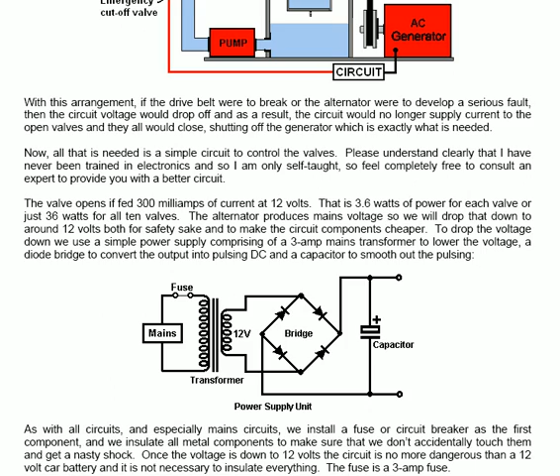The switching circuit which we will use is called an operational amplifier, and thankfully that whole circuit comes ready-made in a standard chip. For example, the very cheap LM358 chip has got 2 separate operational amplifiers in it. This is the way that the 8-pin dual inline housing or chip itself has got the components inside it. You have the minus and plus inputs to the first operational amplifier there, and the output there, and the same for the second one. You've the power supply to the chip, plus over there and 0 over here.

If we were to connect an LM358 into the circuit, we would connect it like that. Pins 8 and 4 connect to the LM358, which is then in business forever and ever and a day. If the voltage at pin 3 exceeds the voltage at pin 2, then the output on pin 1 will be high, which should be about 10 volts. Otherwise the voltage on pin 1 will be low, probably 1 volt or less.

We will use the high voltage on pin 1 to switch on one of the valves, and we use a high power, high gain transistor like the TIP132 to do this. So the circuit that we're going to use is driven by the output on pin 1 of your LM358 chip. It has a current limiting resistor to power up the TIP132, which has a gain of at least 1000. We put a protection diode across the valve itself because it's a coil wound inside it, and we let the transistor drive the valve directly.

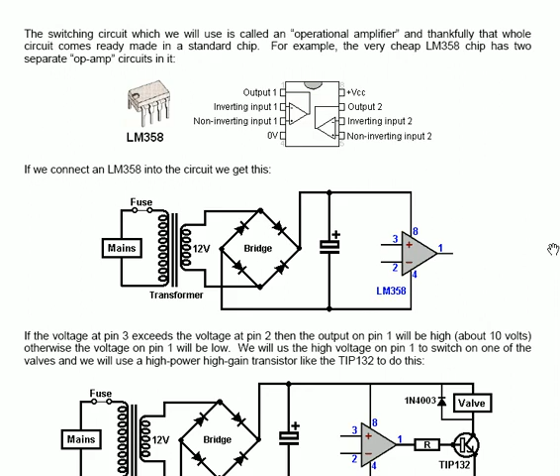The transistor is a very powerful and cheap transistor. Now that's the way that we connect the valve to the particular operational amplifier. The TIP132 can handle 100 volts and 8 amps and has a gain of at least 1000, often a lot more. So if it's passing 330 milliamps through the valve winding, then it will need a base current of 0.3 of 1 milliamp. That current flows through the resistor R, which has about 10 volts across it.

Resistance equals volts over amps, or if you prefer, 10 volts divided by 0.0003 amps, which is 33,333 ohms, or 33k. However, we'll increase the base current by a factor of 3 and just use a 10k resistor. So this is our actual circuit here. The 10k resistor feeds TIP132 and powers the valve on and off, depending on which way the 358 op amp is actually operated.

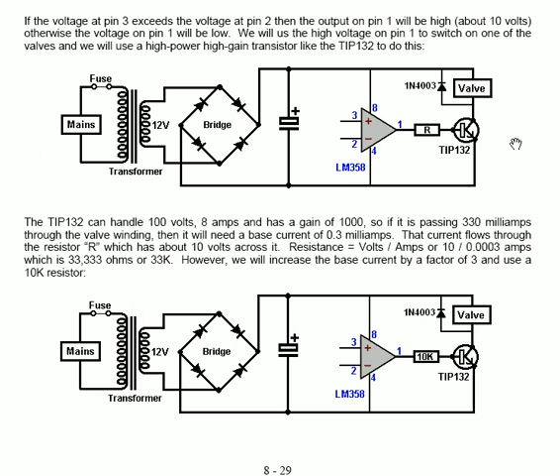Now we need to get the LM358 to switch off, causing the voltage on pin 1 to drop low, starving the TIP of base current and cutting the power to the coil of the valve. And for that we need the voltage on pin 2 to rise above the voltage on pin 3. And we want that to happen if the power supply voltage rises.

So if we connect a multi-turn 10k preset across the power supply, that looks like that or that. Those are two typical versions of it. Then the circuit becomes this. This allows us, by turning the screw on the preset resistor, to set any voltage we like on the pin 2 connection of the operational amplifier.

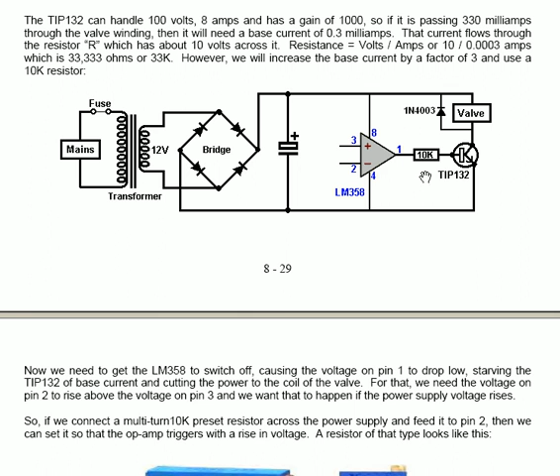The last step is we want to provide a reference voltage which doesn't change if the power supply voltage increases. The approved way is to use a Zener diode with a resistor in series with it, and in theory the voltage drop across the Zener diode is a reliable reference voltage. I have not found that arrangement to work at all well, so I suggest using ordinary diodes such as the 1N5408 instead, using them like this.

You put 4 of them in series and feed them with a 1K resistor, and that gives you a reference voltage caused by the voltage drop across each of these 4 diodes, and I have found that to be a reliable voltage source. Anyway, each to his own. So this gives about 10 milliamps flowing through the diode chain, and some 2.5 or 2 3/4 volts is generated across the diodes. That voltage does not alter appreciably if the power supply voltage increases.

The second op amp in the chip... I'm sorry, that's wrong. The second op amp can be used to control the next valve. Pins 4 and 8 are also connected to the power lines, but what was pin 1 is now pin 7 for the second op amp. What was pin 2 is now pin 6, and what was pin 3 is now pin 5.

The circuit is set up using a bench power supply. Measure the voltage of the power supply powered by the Donnie Watts alternator, and then disconnect it. Connect the bench supply in place of the alternator supply and set the voltage to exactly the same value. All op-amps are connected to the 4 diode reference voltage point.

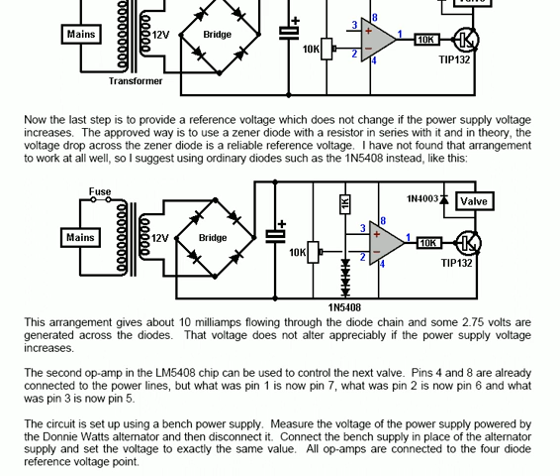Let's say that we want the valves to drop out at every 5 volt increase of the mains voltage. If it is a 240 volt main supply, then the transformer drops that down to 12 volts, which makes the change 20 times smaller. So the power supply voltage will go up by only 5 divided by 20 volts, which is only 1/4 of 1 volt. So you adjust the bench power supply up by 1/4 of a volt and adjust the first variable resistor so that the first valve shuts off if the voltage rises by that 1/4 volt.

Lowering the bench supply voltage by that 1/4 of a volt should have the valve clicking open again. This is repeated with all of the valves, so that the second valve drops shut at 1/2 volt higher voltage, the third valve drops closed at 3/4 of a volt increase over the original voltage, and so on.

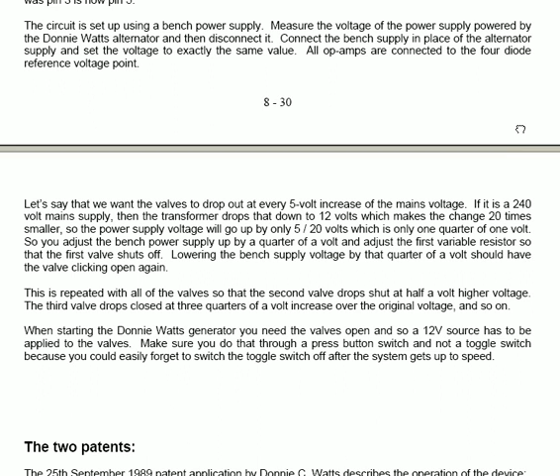When you're starting the Donnie Watts generator, you need the valves open, so a 12 volt source has to be applied to the valves. Make sure that you do that through a press button switch and not a toggle switch, because you could easily forget to switch the toggle switch off after the system gets up to speed. So that's the Donnie Watts generator. It's easy to build if you're persistent. It's not difficult to control, and it is very effective and can power your entire house.

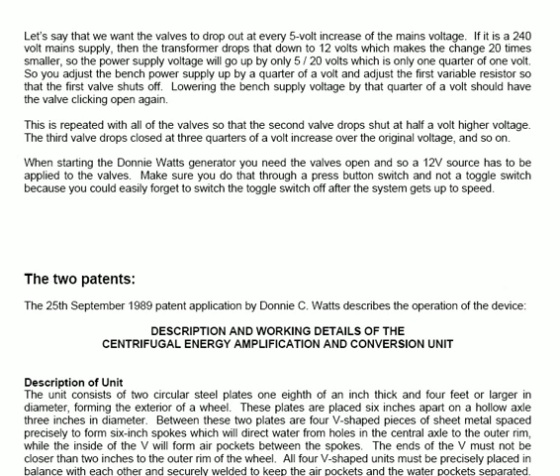The later design is very much more complicated, with moving parts and seals and a rotor whose weight is supported on a rotating axle, as well as rotating in the axle. The bearing itself has to supply a sideways thrust capable of supporting the weight of the rotor and water, and there's a movable jet which is suppressed by springs and pulled down by springs, but can be pushed upwards. There's also the possibility of a butterfly valve. There's also an air connection directly to outside air, and there is a spillway applied to the outer container.

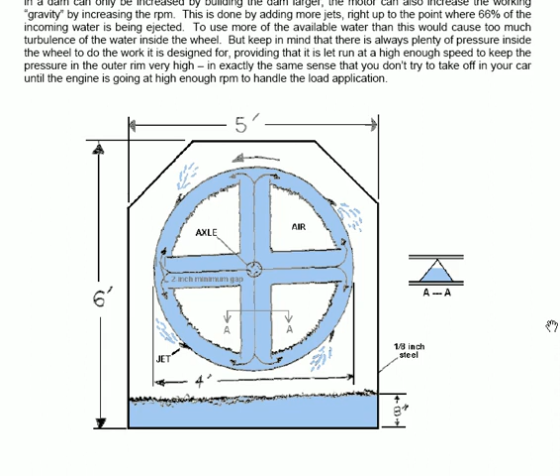This is a very much more difficult arrangement, but anyway, the system itself is supposedly very technical. It shows us some interesting methods of alternating the rotor design. The important part here, which is physically difficult to make and to get balanced, is a spring-loaded pressure relief valve. This is the mechanical way of making sure that the generator doesn't run away with itself, because if it starts running away, the pressure inside increases and the valve is forced open and extra liquid squirts out in every direction all round, not adding to the drive of the drum at all. But that is the way that the design is organized.

And he does say categorically that the areas of the jets should be not more than 1/8 of the area of the incoming supply pipe. That, of course, is not actually difficult to do.